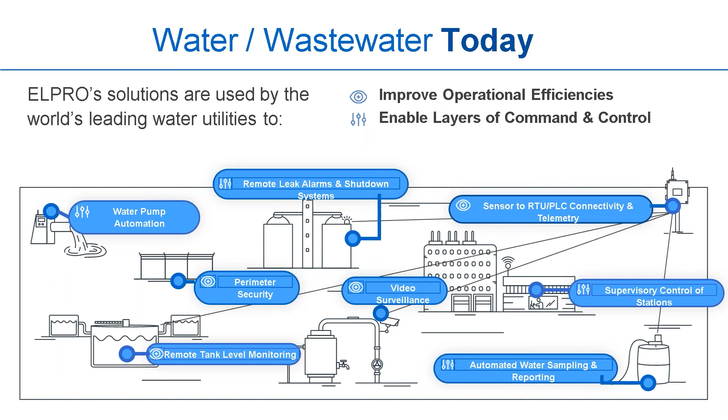Some improved operational efficiencies would be perimeter security. Since water wastewater is now considered critical infrastructure, perimeter security and video surveillance are mandatory at those facilities. Remote tank level monitoring and sensor to the RTU or PLC telemetry information gives you and your customers a better flow of information and the ability to control your environment better.

An example of this would be remote pump station monitoring. A water district needs to upgrade their infrastructure so they can monitor these pumps remotely as opposed to sending somebody out there. In the US, unlicensed 900 megahertz is the standard to deploy on some of these.

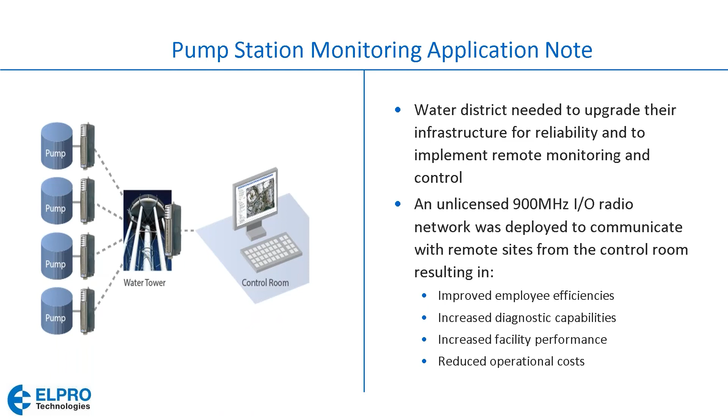Some agencies decide they want to do a licensed version of this, and we do have that option available. By deploying unlicensed IO radios, we were able to improve employee efficiency, increase diagnostic capabilities, and increase the overall performance of the facility while reducing operational costs.

Wireless monitoring over a long distance - a large city needs to monitor their infrastructure, and they've decided to go with a wired line and a wireless deployment to give them this information. Where they already had wired assets, we were able to work with them to get that into the same SCADA system they are using on their wireless.

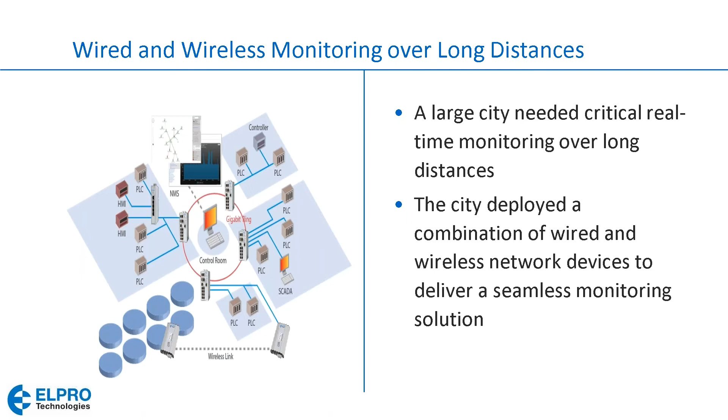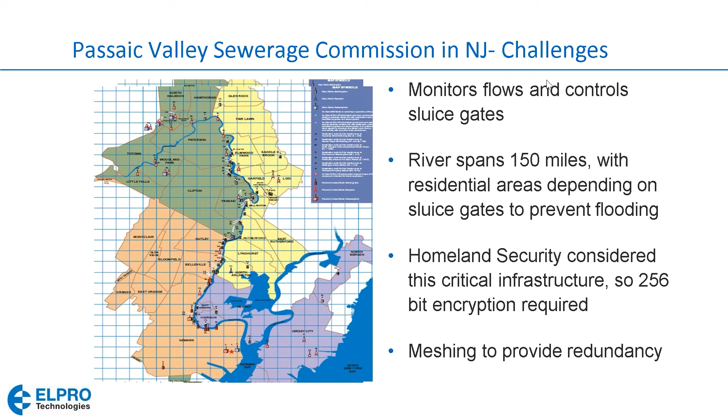What we ended up deploying was 72 915U-2 radios plus 4G cellular modems. We were able to reduce deployment costs by allowing them to use legacy control hardware using Modbus and a DNP3 gateway. We generated the highest uptime due to being able to do multi-protocol support and providing a transition from their legacy SCADA network to a ClearSCADA network.

And we were able to show some flexibility with them by using a common off-the-shelf IoT platform and connecting it through wireless, cellular, and fiber connectivity. What this all generated was reduced travel time to remote sites for them to do diagnostics and troubleshooting, and allowed remote access to the network. So when they deployed somebody, it was to fix a problem, not to diagnose what that problem was.

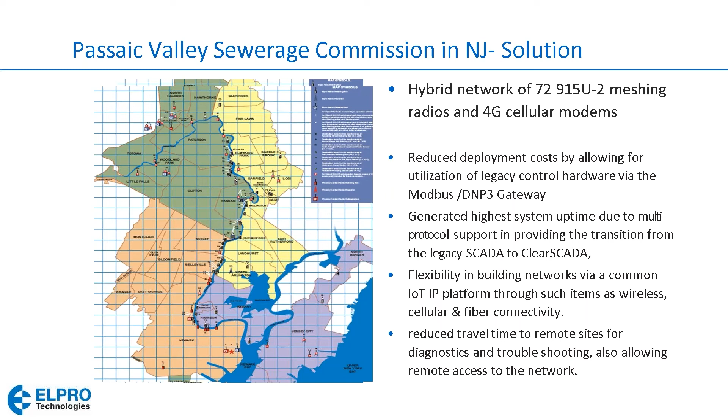In Leon, Mexico, is another water district that we worked with. It services over 1 million people, has over 100 water wells and 9 water tanks, 19 different pumping sites, and various departments were requiring various types of information. So they were going to these sites more than once.

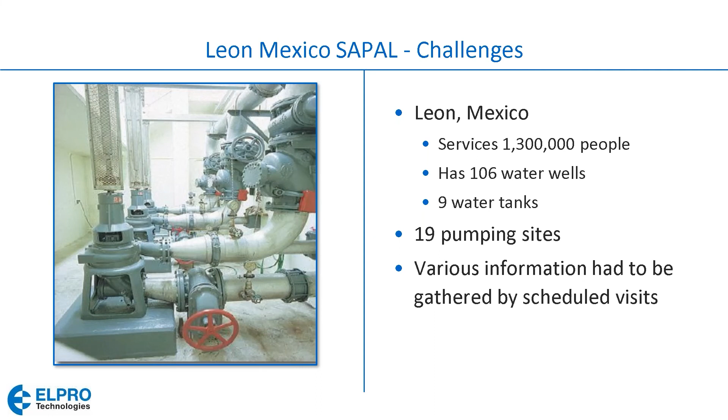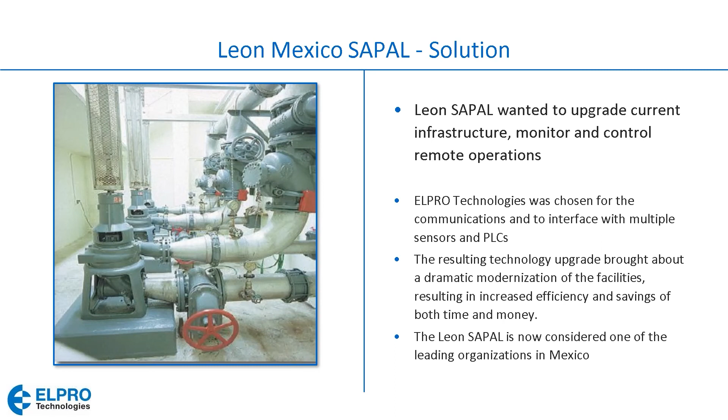What we were able to do is give them a common platform that everybody could use. We upgraded the platform so it was much more reliable, and enabled them to monitor and control remote operations from a single platform. Multiple manufacturers of sensors and PLCs we brought into a single network. And again, we increased their efficiencies in both saving them time and money to modernize that facility. After the deployment, Leon SAPAL is now considered the state-of-the-art for Mexican water, wastewater.

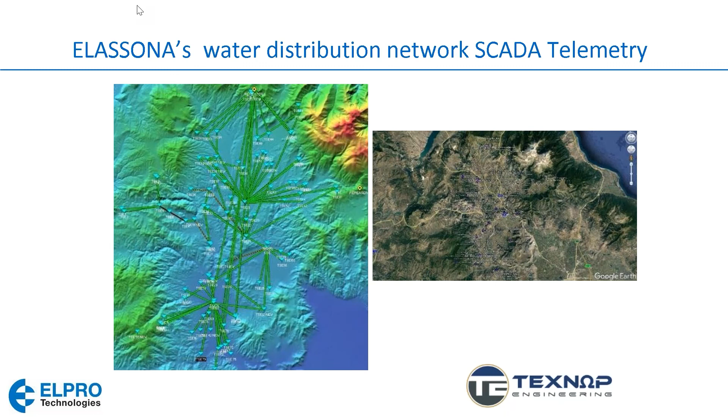So we also have done other projects in other parts of the world. This one is one we did in Greece, and what we did is upgrade a serial network to an Ethernet network. But if you look at the map that is drawn, the heat map, you can see that it's a very complex network. So ELPRO can also expand and run into complicated and large networks without a problem.

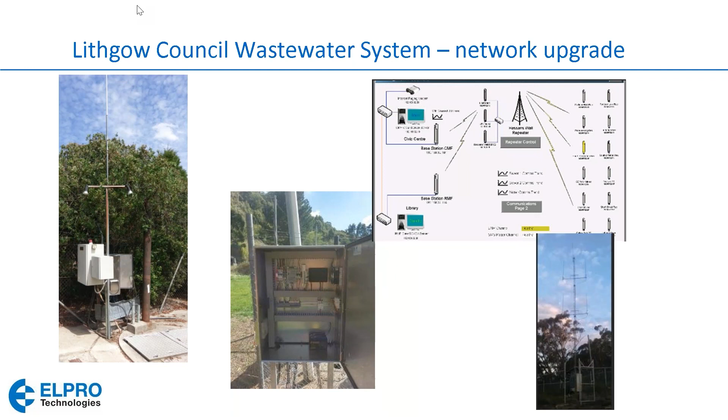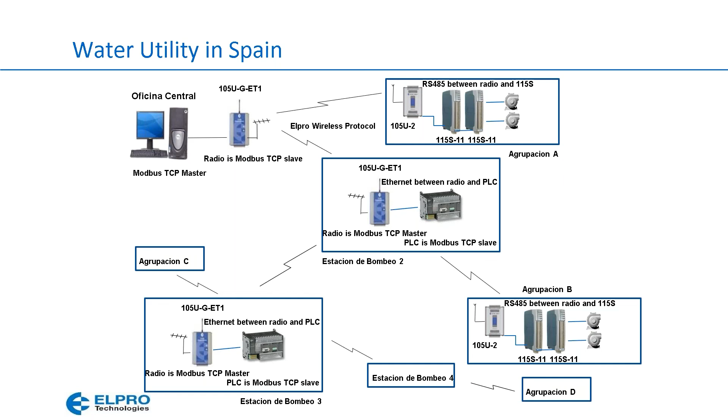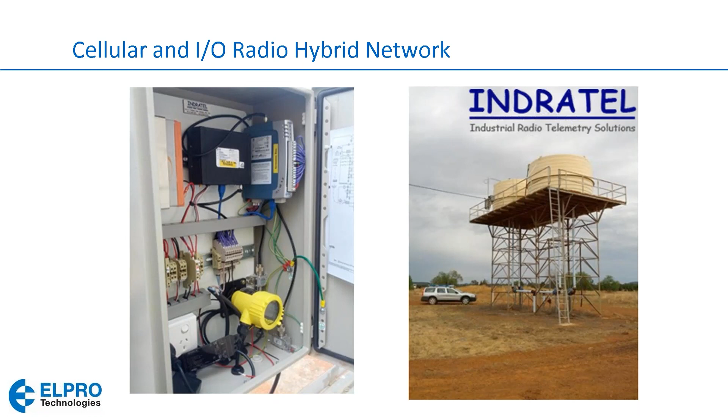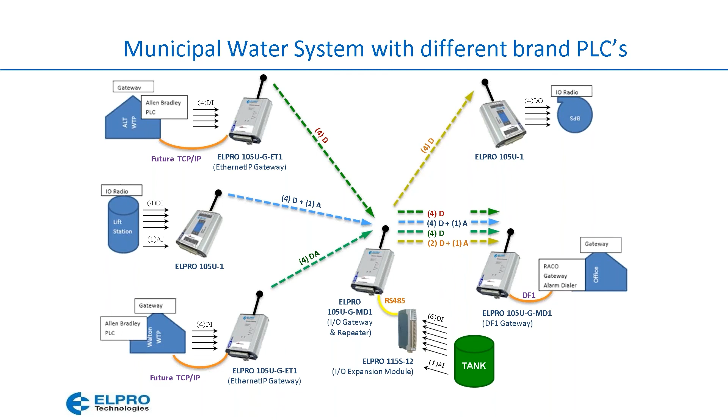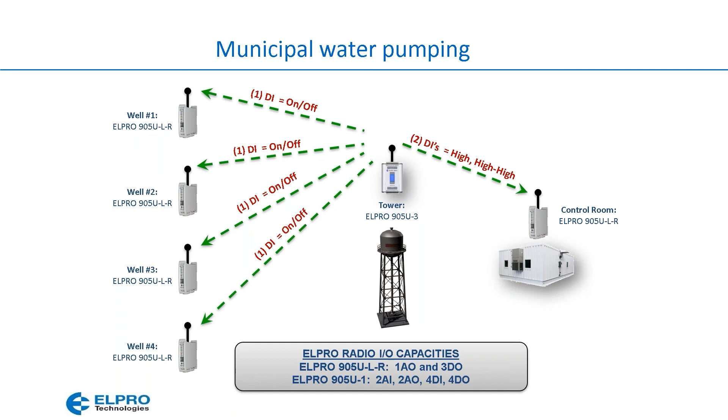And we can also do multi-directional deployments as well, where a remote site is sending back information, and based on that information, start stops are transmitted back out to the remote sites.

Some examples of other water districts and water wastewater that we've worked with: Rancho, California has over 100 of our 900 series radios doing Ethernet. City of Lethbridge has well over 35 of our radios. Vancouver has over 40. Down in Argentina, we have over 600 of our cell modems deployed. Pine Brook, Colorado has 14 of our battery operated units deployed out there on the 415s.

Brian, is there anything that you would like to add?

Just to reiterate the experience that we now have in the water wastewater business, literally having done, I would probably suggest, thousands of water wastewater projects. It's a very significant portion of our business. One of the virtues of ELPRO is that we have so many different types of radios that if 900 megahertz isn't suitable, we have a 450 megahertz option. If cellular is preferred, we have cellular modems offered. So it's just the breadth of products and the breadth of experience, I think, that really count these days.